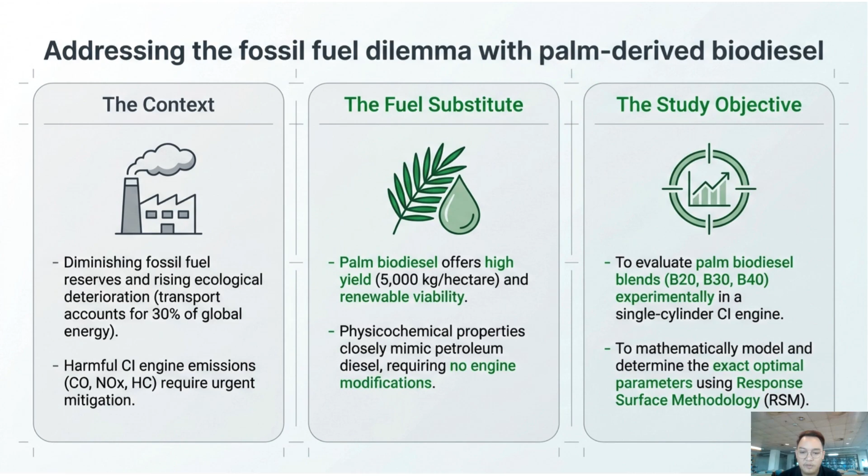Under the fuel substitute, you can see that the palm biodiesel is great because it has a high yield of 5,000 kg per hectare and requires no engine modification. Finally, this study's objective is to evaluate the biodiesel blends like B20, B30, and B40 experimentally and mathematically model them using response surface methodology, or what we call RSM.

So for the next slide, which is parallel investigation, empirical testing meets numerical modeling. On the screen, you can see green boxes showing our experimental setup. We use a two-stage transesterification process to make the fuel, tested it in a Kirloskar TV1 engine, and collected data using an AVL gas analyzer.

Below that, the gray boxes show our numerical modeling using central composite design, which has a 30-run setup and RSM optimization. Both of these paths lead to the big box on the right, which is determining the ideal operational sweet spot.

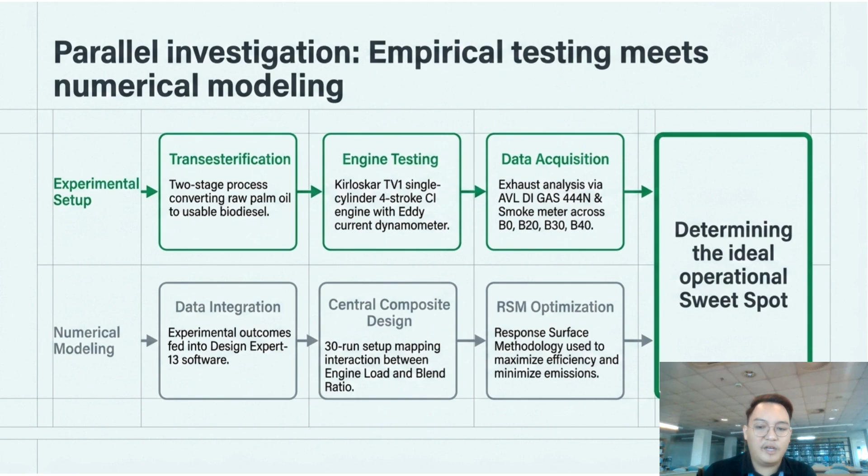So now let's move on to the next slide, which is the first physical bottleneck, viscosity and filterability. Here, you see a bar chart measuring the FBT value, which shows how easily the fuel flows through a filter. The dotted line shows the ASTM standard line of 1.38, and the B20 blend perfectly meets this limit at exactly

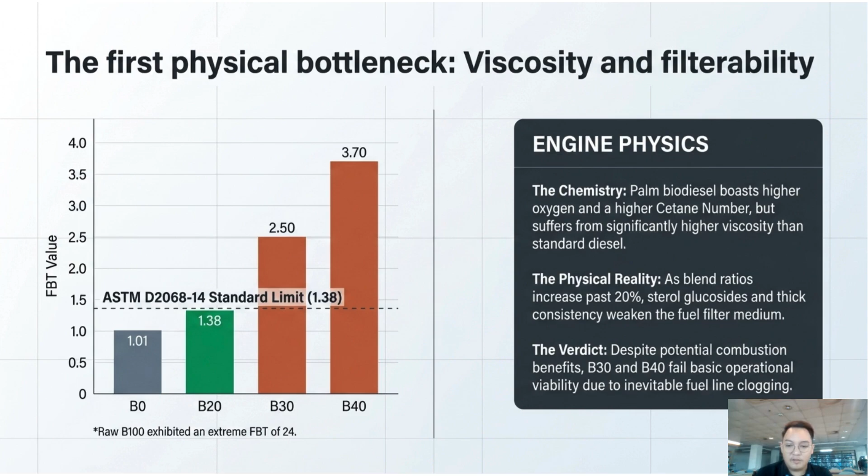1.38. However, as the engine physics box explained, blends like B30 and B40 fail basic operational viability because sterol glucosides and thick consistency cause fuel line clogging.

Now, let's move on to the engine performance, balancing lower energy density with improved combustion. On the left side, you can see two graphs showing how the engine performs as we increase the load. The top graph shows the brake specific energy consumption, which basically means how much fuel energy the engine needs to

run. The green line shows that for the B20 blend, it is 11.52 megajoules per kilowatt hour, which is only 2.12% higher than normal diesel.

The bottom graph shows the brake thermal efficiency, which is how well the engine turns the fuel into actual power. For B20, it is very strong at 32.14%, which is just 1.96% lower than diesel.

If you look at the dark thermodynamic balance text box on the right, it explains why this happens. Biodiesel naturally has a lower calorific value, meaning it holds less energy, so the engine has to consume slightly

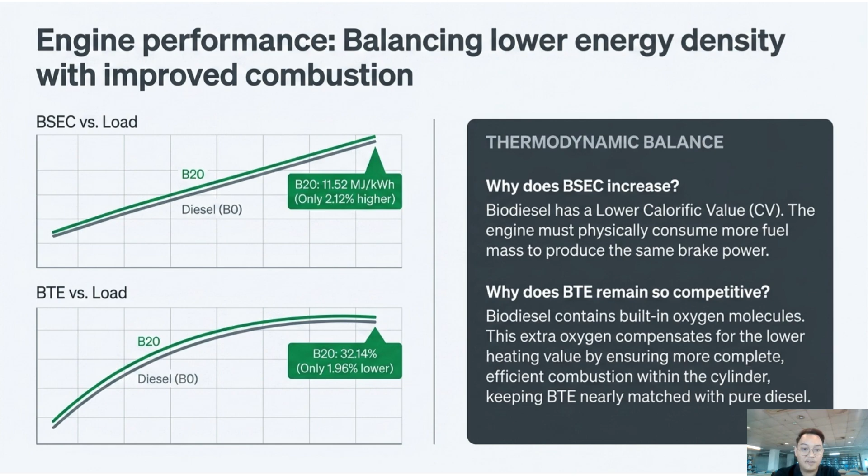more fuel mass. But because biodiesel contains built-in oxygen molecules, it compensates for this by making sure the fuel burns much more completely inside the cylinder, keeping the efficiency competitive.

Moving to the next topic, combustion dynamics, higher cetane number accelerates ignition. On the left, you can see a very clear drawing of a green fuel injector spraying fuel directly into the engine cylinder. At the bottom of this drawing is a timeline measured in milliseconds.

As you read from left to right, you can see the ignition delay phase, followed by a green hill shape which represents the heat release. The dark box on the right, called combustion kinetics, explains the cetane advantage.

Palm biodiesel naturally has a higher cetane number than normal petroleum diesel, meaning it is highly reactive. Because of this, it has a shorter ignition delay, meaning it ignites much faster after it is injected. Finally, under smooth heat release, it is explained that because the fuel ignites earlier, the burning process is extended and much smoother. This is great for the engine because it prevents the sudden, violent spike in cylinder pressure that usually happens with pure diesel.

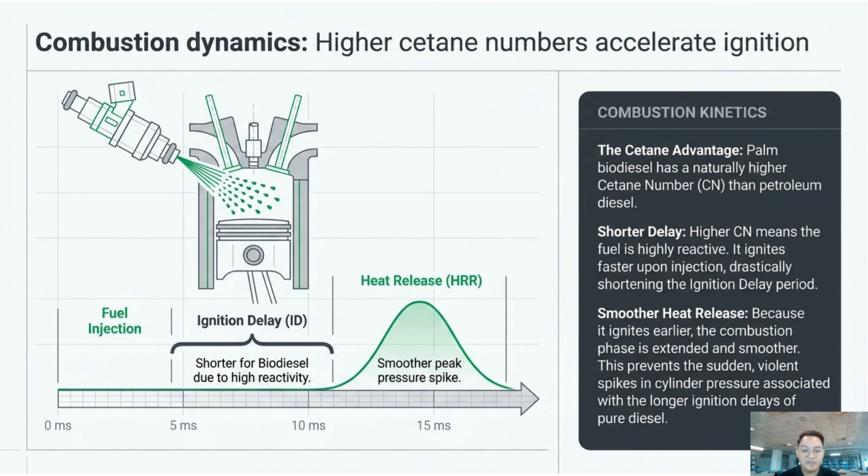For the oxygen advantage, significant reduction in CO, HC, and smoke. This slide shows three very large green downward pointing arrows which represent the exact pollution reduction for the B20 blend compared directly to standard diesel. The first arrow shows hydrocarbon went down by 6.12%. The second arrow shows carbon monoxide went down by a massive 17.67%. The third arrow shows smoke opacity went down by 9.60%.

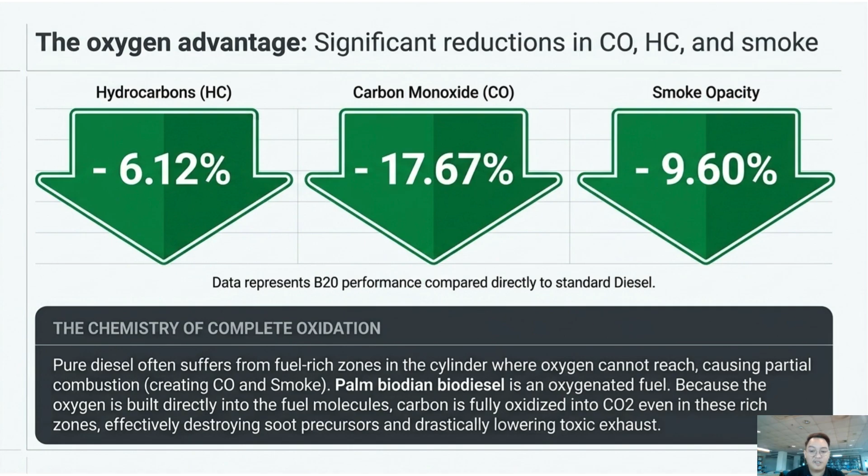To understand why this happened, look at the dark box at the bottom titled The Chemistry of Complete Oxidation. Pure diesel often suffers from fuel-rich zones in the cylinder, areas where there is not enough air, which cause partial combustion and create toxic black smoke. But palm biodiesel is an oxygenated fuel. Because the extra oxygen is built directly into the fuel molecule, the carbon is fully oxidized into carbon dioxide. This effectively destroys soot and drastically lowers the toxic exhaust coming out the pipe.

However, we also must discuss the downside of this thermodynamic penalty. Here you can see a line graph that rises very sharply as the engine load reaches 100%. The orange box points out that the B20 blend produces 5.91 grams per kilowatt hour of NOx, which is 2.03% higher than normal diesel.

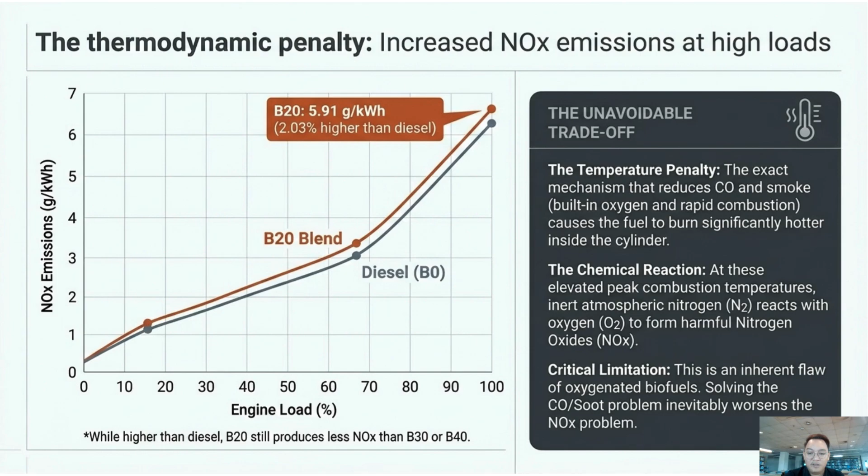If you read the unavoidable trade-off box on the right, it explains the temperature penalty: the exact same thing that reduces the smoke, which is the built-in oxygen and rapid burning, can cause the fuel to burn significantly hotter inside the cylinder. Because of this elevated peak temperature, inert atmospheric nitrogen reacts with oxygen to form harmful nitrogen oxides, or NOx. As the bottom text notes, this is a critical limitation of oxygenated biofuel. Solving the smoke problem inevitably makes the NOx problem slightly worse.